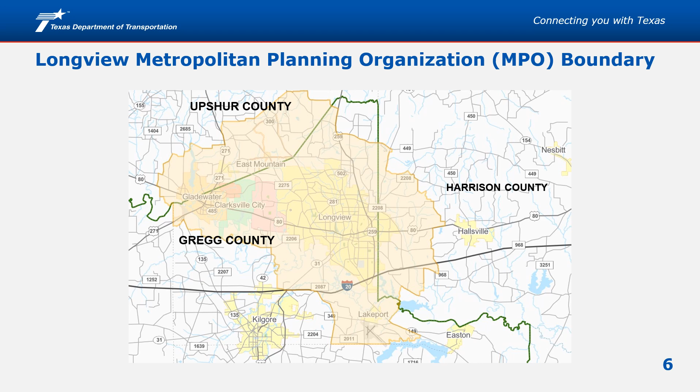We have divided these slides into projects under construction and projects under development.

I would like to start with projects in Bowie County and discuss those under construction or anticipated for later development. The project shown here is a 0.53 mile section of FM 989, or Kings Highway, from the frontage roads north of I-30 to 0.3 miles north of Gibson Lane. This project is located within the Texarkana MPO boundary.

The reconstruction of this roadway includes widening the existing two-lane highway to a four-lane divided roadway with shared use outside lanes and sidewalks. A public meeting for this project was held on May 17th of 2018 and it let to construction in June of 2022.

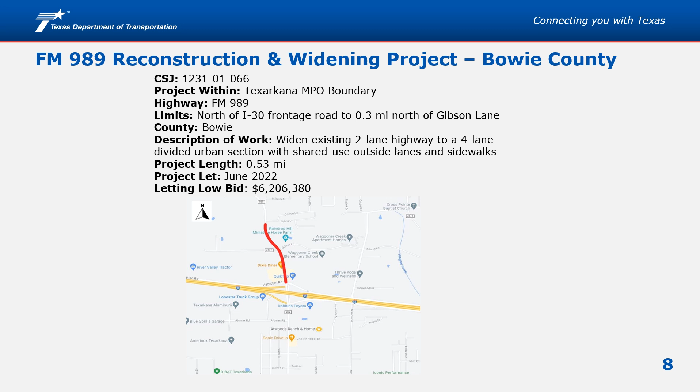The project shown here is an approximate 2.4 mile section of I-30 frontage road from FM 3419 to FM 989, or Kings Highway. This project is located within the Texarkana MPO. The reconstruction includes constructing one-way frontage roads, entrance and exit ramps, turnarounds, and reconstructing the bridge at FM 989 with shared use outside lanes and right-of-way to accommodate sidewalks.

This project let to construction in June of 2022. The letting low bid for this project is $52,594,160.

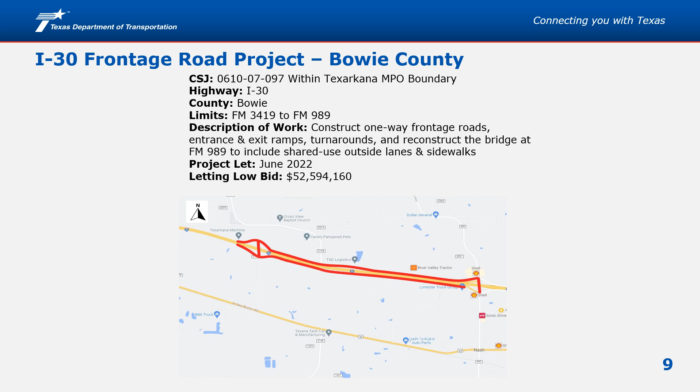The project shown here is an 11.36 mile section that includes three separate sections from 0.1 mile west of US 259 to 0.3 miles south of I-30. The proposed improvements include widening US 82 to a four-lane roadway with a continuous center-left turn lane. In order to accommodate pedestrians, sidewalks are proposed within the city limits of DeKalb.

Bowie County was awarded the TA grant and the RAISE grant to reconstruct the Northeast Texas Trail that parallels US 82 on the south side. The trail will accommodate both cyclists and pedestrians. The next slide describes the type of work and the individual project limits.

A public meeting for this project was held on November 5th of 2019 and led to construction in August of 2024. The letting low bid for this project is $115,056,618.

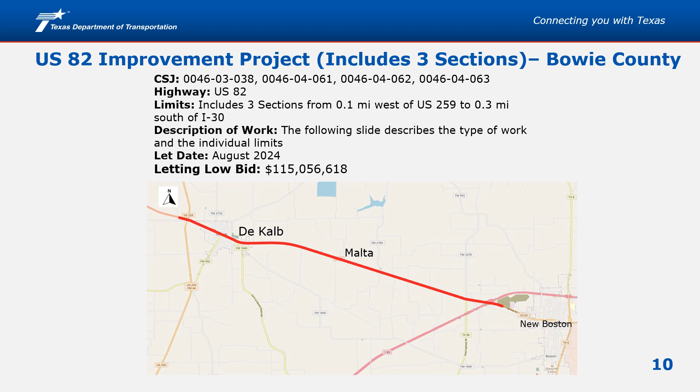The western portion, called the DeKalb section, includes widening, reconstruction, and realignment of US 82. The proposed roadway section will consist of one 12-foot travel lane in each direction, one 14-foot shared use lane in each direction to accommodate bicycles, a continuous center-left turn lane, and sidewalks for pedestrians. A drainage design featuring a new storm drain system with inlets will also be installed.

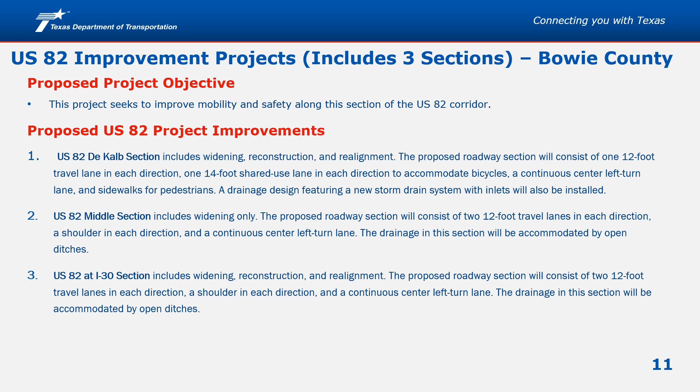The middle section includes widening the roadway only. The proposed roadway section will consist of two 12-foot travel lanes in each direction, a shoulder in each direction, and a continuous center-left turn lane. This illustration is the proposed typical sections for all of the US 82 projects from the previous slide.

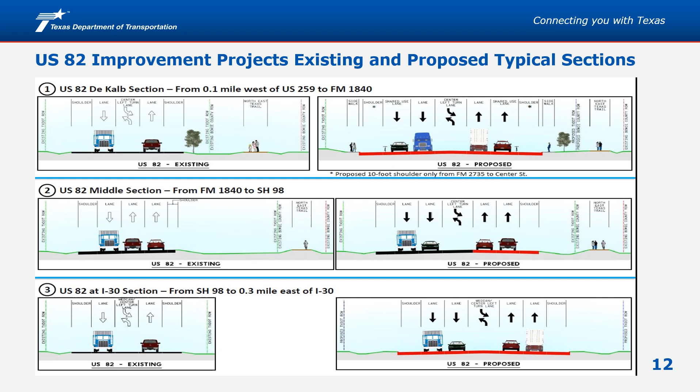The project shown here is replacing the existing bridge with a new bridge and will include two 12-foot lanes and two 10-foot shoulders to improve mobility, enhance safety, and accommodate cyclists. This project led to construction in May of 2023. The letting low bid for this project is $45 million.

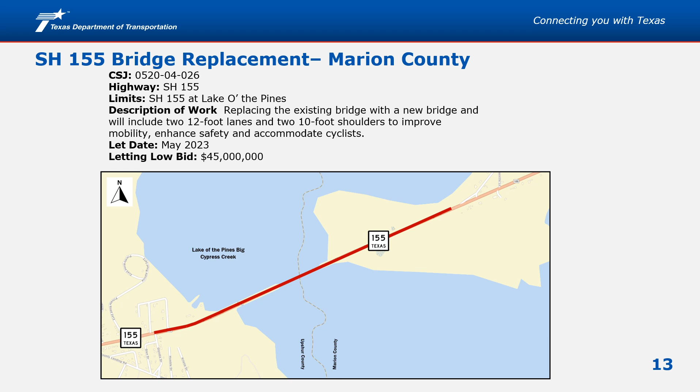The project shown here is a 1.62 mile section of State Highway 149 from 0.8 miles south of State Highway 315 to US 59. The reconstruction of this roadway includes widening the existing two-lane highway to a four-lane divided highway with shoulders to accommodate cyclists. This project led to construction in September of 2022. The letting low bid for this project is $29,546,263.

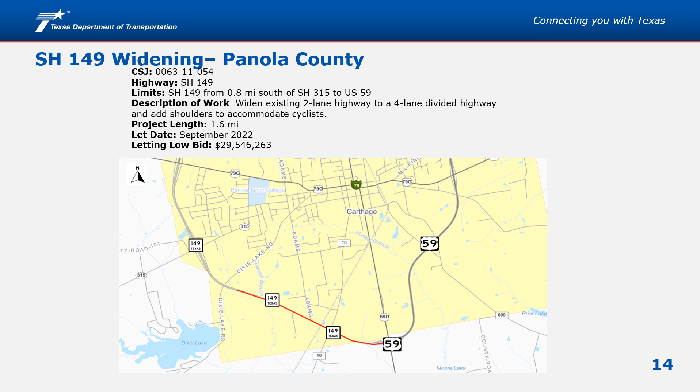The project shown here is a 2.1 mile section of FM 1735 in Titus County, from State Highway 49 to 2.1 miles south of State Highway 49. The reconstruction of this roadway will improve the existing two-lane highway to add a center turn lane with 10-foot shoulders to accommodate cyclists. The project let to construction in January of 2023. The letting low bid for this project is $11,920,528.

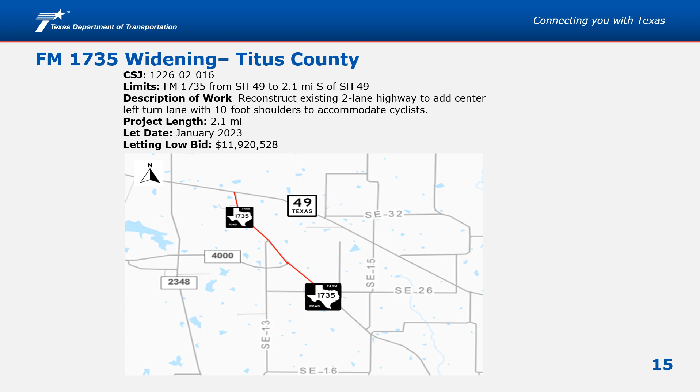Now for the projects that are under development.

This project was selected from the 2019 TxDOT TA program call and will work with the City of Texarkana to assist in plan preparation. The project name is the Kennedy Lane Pedestrian Improvements. Phases of work included in the award is preliminary engineering and construction. The project description is that the project will construct a sidewalk along Kennedy Lane and construction of a 12-foot asphalt shared use path extending along Cowhorn Creek Trail from Kennedy Lane to College Drive. This project let to construction in November of 2024. The estimated letting cost is $1,848,088.

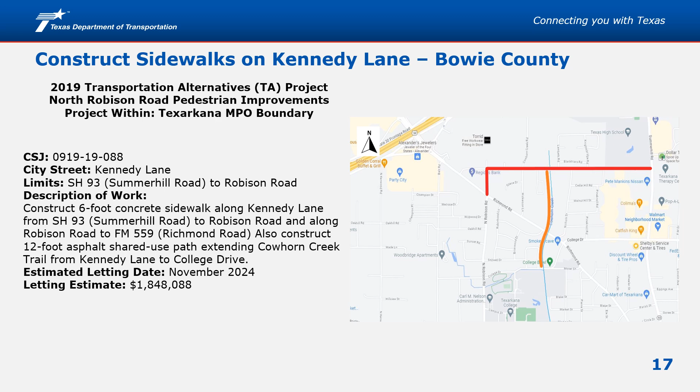This project was selected from the 2019 TxDOT TA program call, and TxDOT will work with the City of Texarkana to assist in plan preparation. This project name is the North Robison Road Pedestrian Improvements. Phases of work included in the award is preliminary engineering and construction. The project description is to construct sidewalks along North Robison Road to include crosswalks and improvements to multiple existing signals. This project is scheduled to let to construction in December of 2024. The estimated letting cost is $2,287,179.

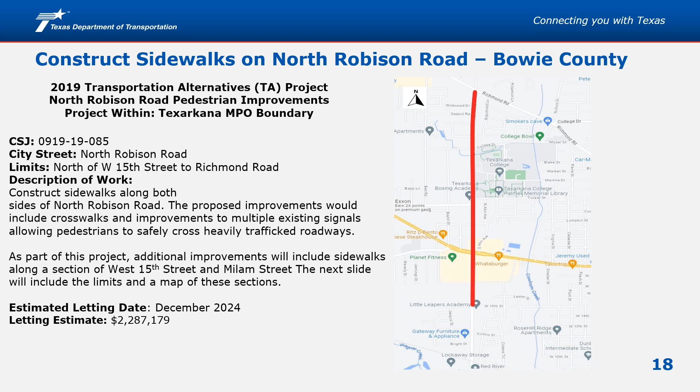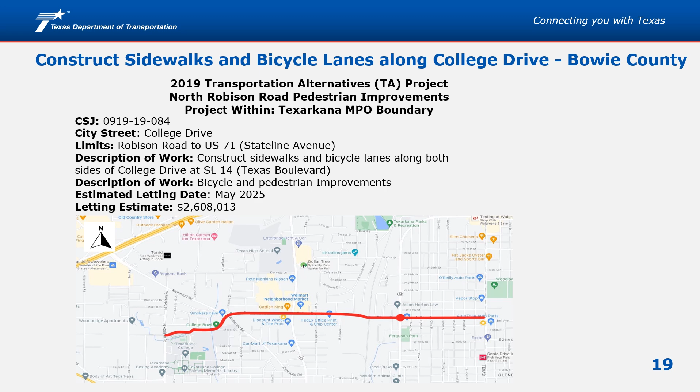This project was also selected from the 2019 TxDOT TA program call, and TxDOT will work with the City of Texarkana to assist in plan preparation. The project name is College Drive Bicycle and Pedestrian Improvements. The phases of work included in the award is preliminary engineering and construction. The project description is that the project would construct sidewalks and bike lanes in the City of Texarkana along both sides of College Drive from Robison Road to US 71, which is state line. This project would include bike and pedestrian signalization improvements at State Loop 14, Texas Boulevard. This project should let to construction in May of 2025. The estimated letting cost is $2,608,000.

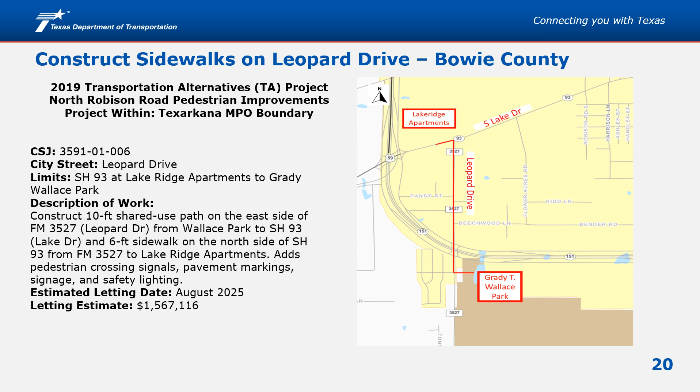This project was selected from the 2019 TxDOT TA program call as well, and TxDOT will work with the City of Texarkana to assist in plan preparation. The project name is the Leopard Drive Shared Use Path and Pedestrian Improvements. The phases of work included in the award was preliminary engineering and construction. The project description is that the project would construct a 10-foot shared use path on the east side of FM 3527, or Leopard Drive, from Wallace Park to State Highway 93, Lake Drive, and a 6-foot sidewalk on the north side of State Highway 93 from FM 3527 to Lake Ridge Apartments. This will add pedestrian crossing signals, pavement markings, signage, and safety lighting.

This illustration is the proposed typical section of the US 82 West project as shown on the previous slide.